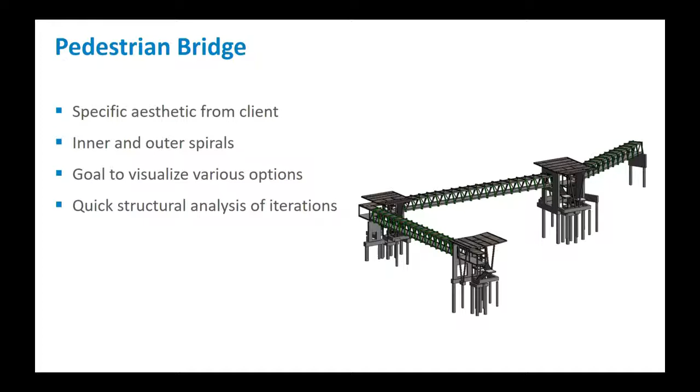So they wanted to be able to sort of stretch and bend and change how this looked to decide what it would be. But that's kind of a complicated piece of structure to stretch, flex, and bend and be able to do a quick feasibility study saying, hey, yeah, that's going to work. Because the structure of the bridge is entirely aesthetic, there's no hidden structural members. We just used what they wanted with the helix, is what we came to call it. So we wanted a flexible model, they wanted to be able to flex absolutely everything. So we had several iterations of this guy.

Then the roof was a little bit more simple in the scheme of things. What we got from the client was a CAD file that he had blocked out sort of the shape that he wanted in a look. And he goes, well, I started doing this and realized I don't even know if this is buildable. So I want to send it to you guys, and can you do a quick study on this for me? Just for a show of hands, how many structural engineers actually get input from their architect that early on? Sorry, I thought it was pretty.

So then we took it one step further. We're like, he wants to take this into conceptual iterations. So we said, how about if we just give you back a tool you can flex and play with, and when you've come to all the iterations you want us to check, send it back. Since we built it, we have ways to get our structural information out of that. So that's what we did. We're going to start with the bridge, and it'll probably be fast. I hope we'll get through all of it, but please feel free to interrupt and ask questions. We tend to talk quickly, so this should work out fine.

All right, so starting out. The general approach of the bridge was it screams repeater, right? It repeats through this inner and outer helix. But it also needed to be adaptive because it needed to stretch and bend, and those angles potentially needed to shift. So we started with a 2-point adaptive component that we brought into a host family and repeated it, and it iterated from there.

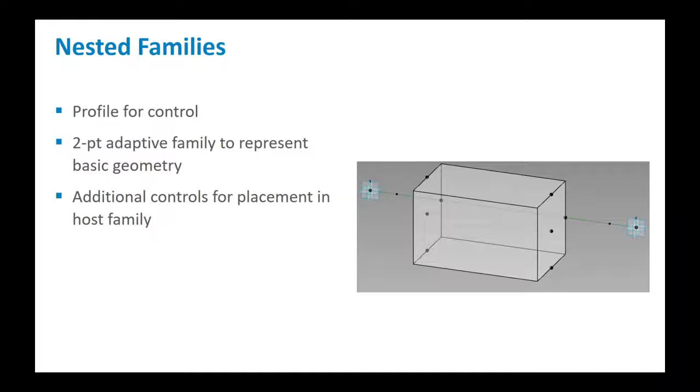Think about insertion points when you're thinking about structural framing. You have the top, bottom, left, and right. It became evident real quick that we needed that sort of functionality. So we essentially made a structural beam out of this 2-point component. And then you want to switch?

Sure. So, of course, Desi just said she needed a rectangle family. I don't play that game when it comes to adaptive components. So for me, I'm going to cover a little bit of what it was. I've been dealing with adaptive components since they came out, I've taught a few sessions on it. And anybody here besides myself find adaptive components extremely quirky? Right? So some of the tools I use eliminate that.

So what originally started with this family I had is I just have this rectangular profile. I don't know if I was deprived as a child from playing connect the dots, but when I'm doing adaptive components, I like to host points on points on points on points and connect those points with lines. It's the most stable way I've found for dealing with adaptive components. In this particular example, I have my 2 host adaptive points, and then these points are hosted to that, set up with an offset. So I just have an inside here, you'll see that in the offset parameter, right here, I just have a parameter for half width, etc. So I like to host points on points to get things to accomplish.

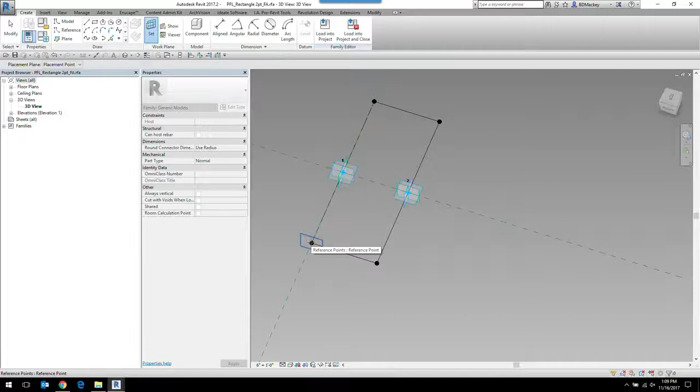When you say you host on points, do you mean you're hosting on a plane? One of those planes? So when you're hosting a point on a point, you can always come up here and hit the set button, and then using the tab key, you can get to any one of the 3 work planes that a point has. I am also slightly a type A personality - she might say more than slightly - but usually what I will also do is name every single one of my points, because then it'll tell me what the host point is.

So as I start going through, who here names their reference planes? Y'all should, because in 2018 you can actually see the name of the reference plane in the project environment. I blogged about this last week, so that's a huge tip for me.

But I do the same thing with adaptive component families. Normally, if I'm going to host a point off of another point, they will all be labeled. So I'll say like point 1 left, point 1 right, etc. So when I'm looking at an additional point, that will come through.

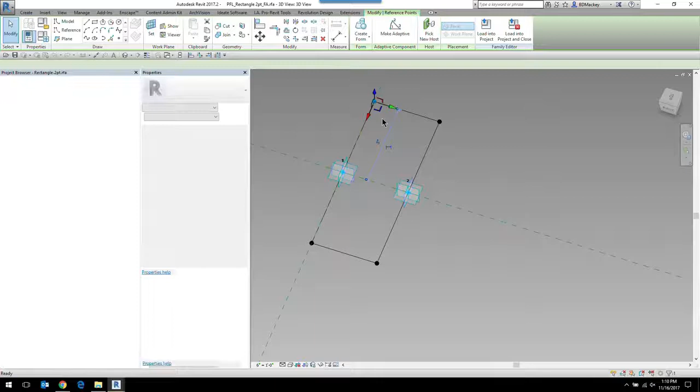So what I ended up doing is I take that rectangular family and I host it into another adaptive component family. And what I have found with adaptive component families that's very buggy is if you host an adaptive component into an adaptive point that's nested, more than likely it will screw up. Anybody put a rectangle family in and it starts rotating and twisting and you're like, what? Well, that's the reason for that.

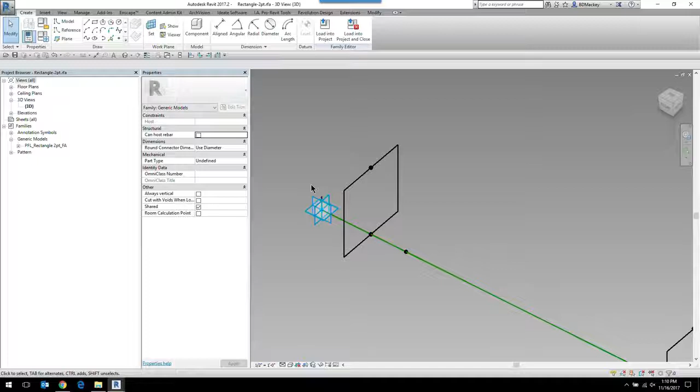I cleaned that up, we're being recorded. I usually say something much harsher than that.

So what I have found is between my 2 adaptive points, I will draw a reference line. And then I will host a point onto that reference line - again, my connect the dot deprivability from my parents. And when I do that, that eliminates the twist factor happening in your adaptive component family. So yeah, sure, it would have made much more sense to take this rectangle and just host it into the middle of the adaptive point family, but more than likely that will blow up.

So I take a point and I literally host a point on this reference line. And what's great about a point hosted on a reference line is it also allows you to then move that point from either the beginning or the end of that reference line to deal with it.

So since I usually want that point to be where the adaptive point is, I always just parameterize this to allow me to move that point in and out. And I just call it control point. So I can just go ahead and move that point in and out relative to the length of the line. I don't really care where it is, just for the ease of editing this object.

So I don't want it on the end because then I've got a point on top of a point when I'm creating and editing the family. So that's the only reason why I have that.

And I did have to make a tweak to this family because originally when we put this into the bridge, we got to the corners and we had the big void in the corners, and graphically we just wanted to overlap them for very quick ease.

So I did redo this, and basically this point then has this point here nested onto it, so I could do a positive or a negative offset to get those to move in or out.

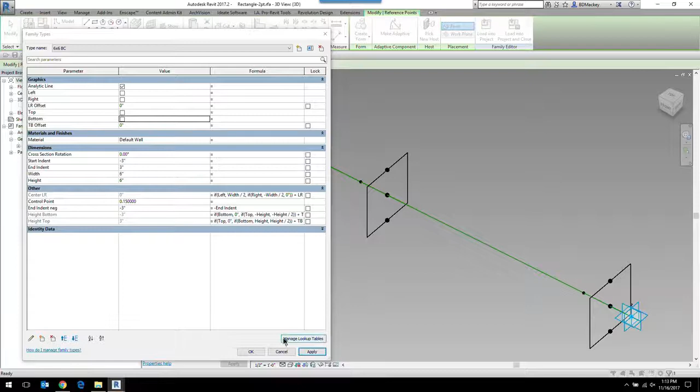This just really comes into play - it was really beneficial in this project here, but also just with adaptive component families where it becomes a pain. Has anybody ever put one in, and on this adaptive point it hosts this direction, on the next one it hosts that direction, and you're like, ah! So rather than loading 3 different families, I can just simply change the insertion point by checking that box.

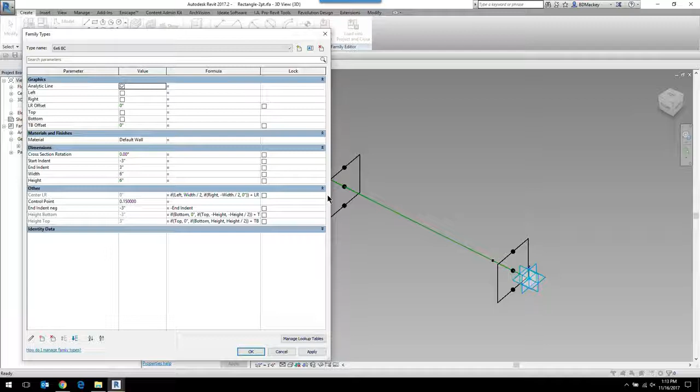And it's just basically a simple conditional statement saying, hey, if that's checked, be half of the width or depth or height, whatever it's going to be. So it's not that confusing.

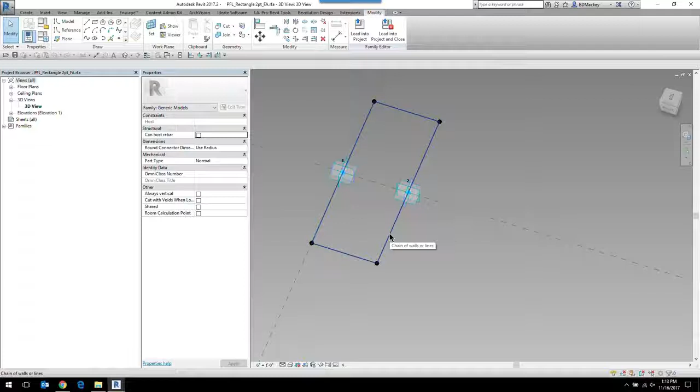Since I nested that adaptive component family, I've got the two here. Going back a step, in that rectangle family these are model lines, so they can't be reference lines, they are model lines. Since you can't use a profile in an adaptive component family, you have to use an adaptive component family with model lines in it.

What's great about it is once I got the rig all set up, I can just select those two nested families, say create form, and I got my rectangle. It's kind of a roundabout way to get into this, but that's really what this family allows us to do.

Once we had that done, we built this. This is the host family. It ended up with eight or nine reference lines that are divided, and this adaptive component is hosted on it and repeated. We parameterized absolutely everything about this, the number of divisions and the length of it, so we could have three different segment lengths.

The architect wanted to know, which you'll see when Brian opens up the family, what the angle of all of the members was, how it was going to look. It was very much about how this is going to look from the ground, as you're driving under it and as you're walking through it.

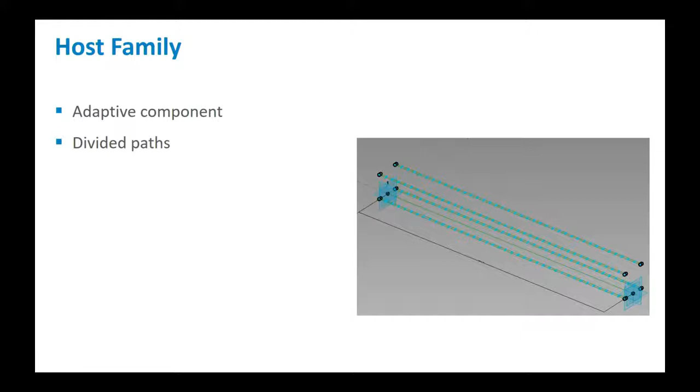So we have a lot of, everything is flexible. It made for kind of a complicated family. And then, so what we did, and what I did so many times, there were so many iterations of this.

This bottom member, they wanted several different iterations, one where it slants and one where it's horizontal, perpendicular to the bridge, giving a spiral look. But the architect found that if you continue the spiral so each element has an angle from the ground, it doesn't quite look like that. It wasn't the aesthetic they wanted, so they wanted several different ones.

This one, I think, is the final one with the bottom that's perpendicular, so that's the outer helix. Then there are these inner pieces that run the length of the beam, or the bridge. So here's the family.

Using adaptive component families, I went along the same approach as with that two-point repeater. In this case, they're not adaptive - we ended up at the very end just adding a length parameter between one and two. Or no, they still might be adaptive, I don't remember, we went through so many iterations of this.

I think this is an earlier iteration. Towards the end, it got really complicated for the architect, or even the project team. I was rebuilding this and placing it for them by the end because so many things were parameterized that it was hard to flex, hard to understand - which I kept saying from the beginning, but they wanted it that way.

Once we had the length locked down, I started pulling that functionality out of it. At the end, this adaptive component was one point, with a set length. So here they are, both adaptive components - adaptive points, excuse me.

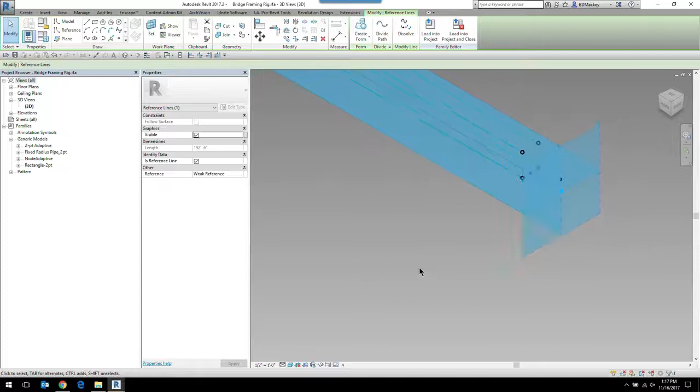We didn't do it with this control point, but you can come up here and say, I want to divide the path. I don't remember when we did this, maybe in Revit 16 or older versions - if you had two lines joined together and divided the path, it would divide them independently. But that's been fixed in the last few releases, so now if you have lines joined together and divide the path, it ignores the fact that there's a join. Really nice feature when they added that in. It's kind of like the old AutoCAD divide command.

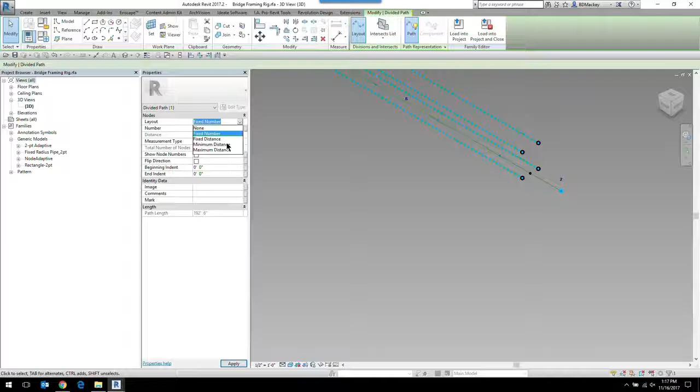So I can come in here and say, okay, I'm going to divide this path, and then you can also parameterize it - do you want a fixed number or a maximum spacing? We went back and forth on that: are we going to go with a fixed number parameter, or a quantity parameter? We ended up going with just fixed number.

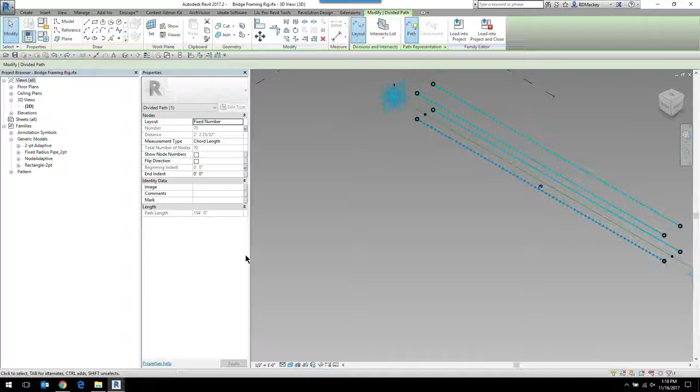That was actually kind of difficult because the client wanted the panel points of the bridge - one revolution of this helix - to be the same in each of the 3 segments, which were all different lengths. So there was a lot of coordination and a lot of formulas, which made me happy, figuring out how many divisions and what the length was. It was actually a little complicated.

It also got more confusing because they wanted 6 divisions, but technically, because of the angle, we were skipping like 4 bays to get it to happen. So like, oh, they need 6, but we have to skip 4. So if they want 6, we have to type in 40 or something weird. It was a little confusing.

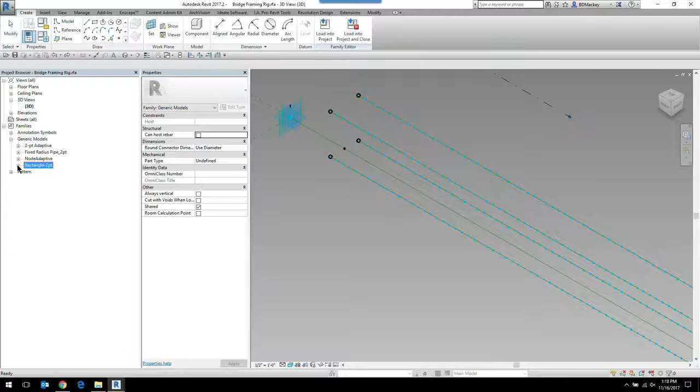Once that was done, I just took that rectangular 2-point family and placed it on here. For those who haven't played with repeaters or divisions, if you just do 1 and say repeat, it repeats along every single one. But like I said, we had to skip a few.

Yeah, it's 4, I don't know, it's 4 with the flat bottom. I'm going to pull Emeril out of the oven in a minute and go bam! We're right near one of his restaurants, I figure that's appropriate.

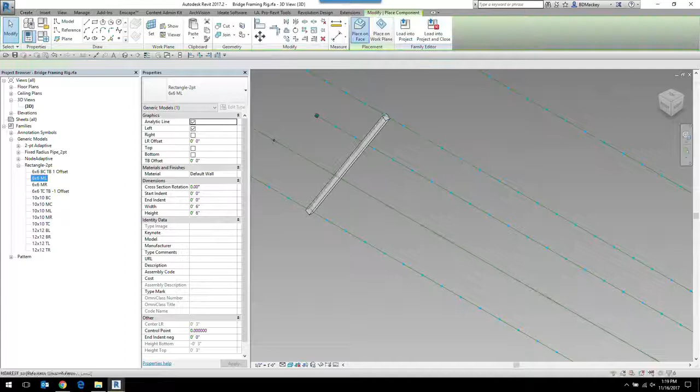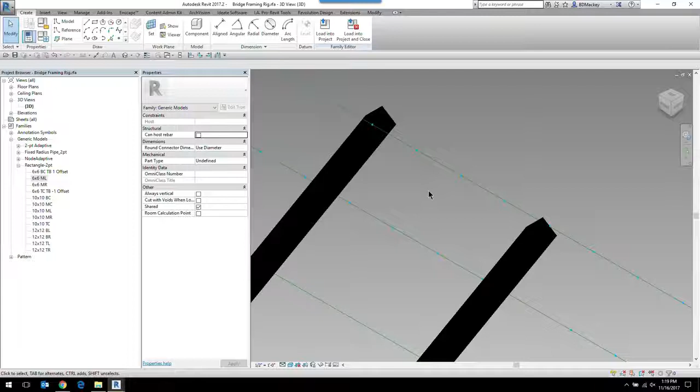But the other thing you'll start to find, and I actually want to do this one slightly different, is when you have that on there, it also matters the way you pick when you're working with adaptive component families. This one, it didn't really matter, but you can kind of start seeing - I went one to the middle right, but if I take both of these, with the family that allows me to change it, if I go from the middle right to the bottom corner - because this one I went up and this one I went down - you can see they're on opposite sides of that line. So with adaptive component families, directionality, the way you draw things, becomes very critical.

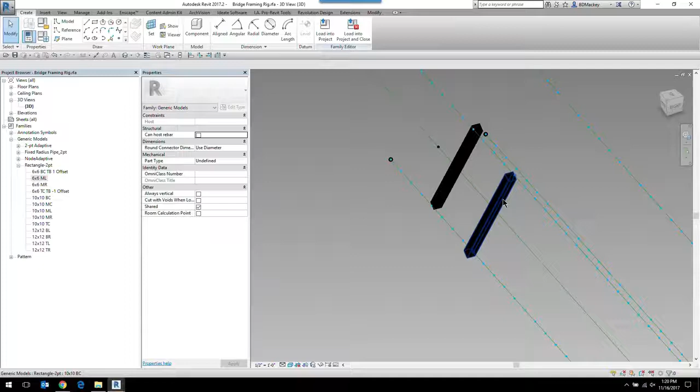When you have to delete things and redo it in like 3 weeks, you're like, crap, did I draw them this way or that way? Inevitably you'll get it wrong. It sort of puts in your face what we all preach to people we work with: always model in the same direction, do it consistently. But when it comes up to you like here - I'll model this 2 different ways, so it's going to behave in opposite directions - you suddenly have to really adhere to those rules and immediately see why. That was challenging with this, especially once you got all the members in there and had to figure out which point I'm grabbing - it became complicated.

So with that, what we started doing is we selected this, and then you can go up and use the repeat command or the array-looking icon, and since we had 3 spaces between it, it will continue that going across. We had to do this going up this side, across the top, down the other side, across the bottom, kind of making that spiral effect going around.

And that was what we did just to start, just to get the concept to show them, hey, here's what the spiral pattern will start to look like. So, do you want to pull it out of the oven?

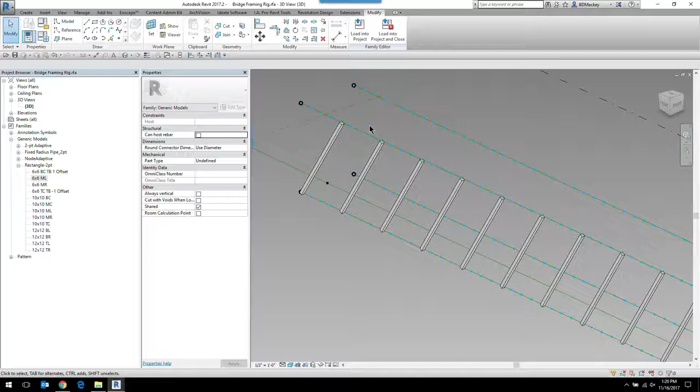So what was kind of interesting with this is that we built up all of these angles, those are just reporting parameters so they could understand what the angles were. She's talking about these dimensions here.

So then the client said, well, we have a logo that has a whole bunch of angles. What angle are you? So we can compare that to the logo. Yeah, we're not joking.

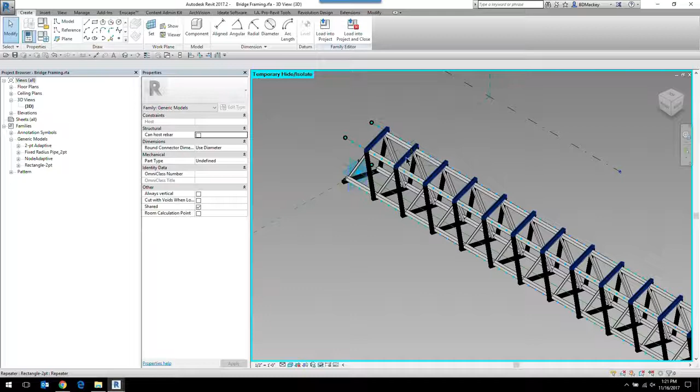That was real. In fact, if you orient it just right, you might be able to guess who the client is, which I think I've removed from everything. So if you accidentally see it, pretend you don't know it. And if you guys from that client are listening to this recording in a year, we had your permission to show this. I did ask for permission.

So what was interesting about this, we built in all that parametric behavior so we could go from, we ended up calling it bays, 13, 16, 17, 18, 19 bays for the different lengths of the bridge. But we found out, and it's a really strange behavior, and I started asking other people that have done a lot of repeaters if they've noticed this behavior.

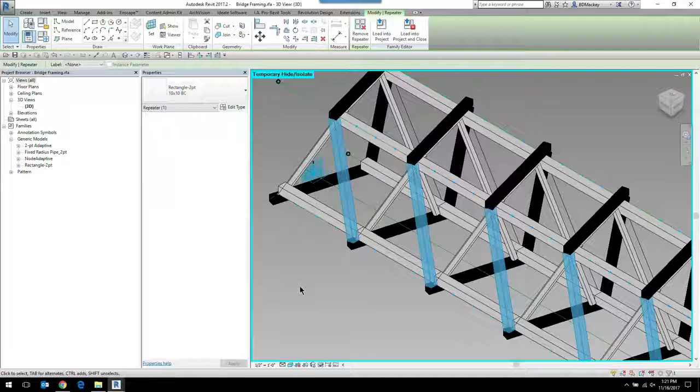We don't know if it's something that's repeatable, but it was for us: if you change the number of divisions, say go from 13 to 16 bays, the division is centered along the repeater path. So I want to add one complete revolution to the end. Instead, if I added one complete revolution, it was adding a half to the beginning and a half to the end, which was annoying.

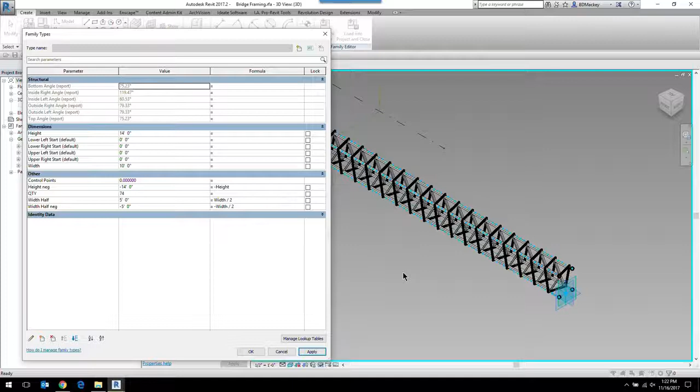So this ended up being 3 separate families that, of course, they couldn't decide between. So I think I have 10 — I have like everything from 13 to 20. So there's several. That was kind of complicated.

So this is the final family here. No, this isn't the final. No, it's not? So the other thing about this that I ended up actually changing and building into these families.

Back to the family, I'm going to go to it. When we put it in there, we realized, oh, we've got to do the inner spiral and the outer spiral. When I had this set up, they also were then going to start having some additional offsets. So that's not the button I wanted.

So back in the original family, I went and tweaked it even more, because on that rectangular 2-point family, I showed you guys how I have basically the left, right, center checkboxes, but we had to go in there and also start adding in an offset, because in some of those cases we wanted to — I'll make it bigger than that. So now it looks exactly like structural framing on a family, right?

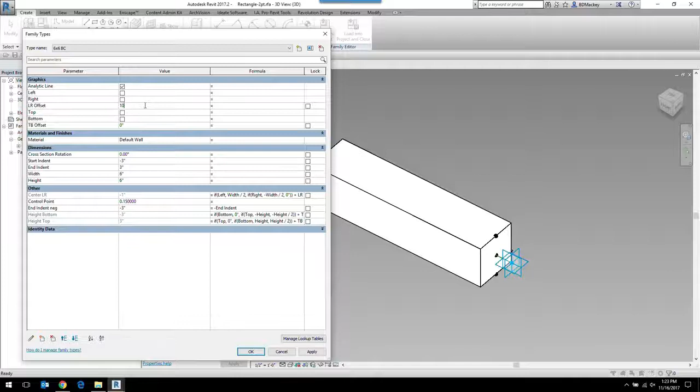You have the Z offset. Yeah, and the Y offset, Z offset. So I also started assisting in that as well.

So when I told you guys I had this point and then I hosted this point onto it, I then had to redo it all, rehost another point so it would get shifted off to the side. So I could shift that with a positive or negative number, because we really needed to come in there and start playing with the original family that we had.

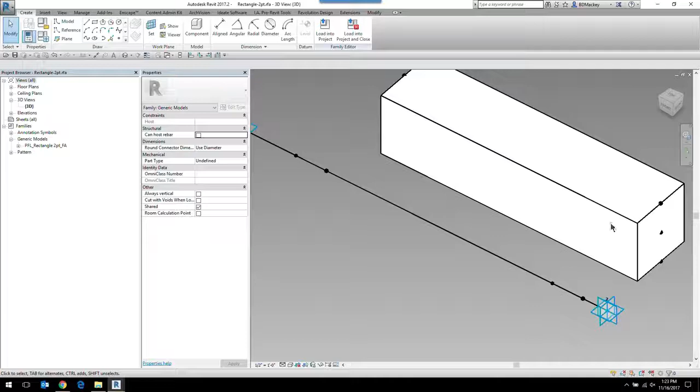We were sitting there thinking that, oh, okay, so we'll just have this one set of repeaters and everything will be on it. The final family, we ended up having additional lines to host the inside members to, the outside members to, the floor members to, the roof members to, etc. So it wasn't so simple, but we had this set up to be able to come through.

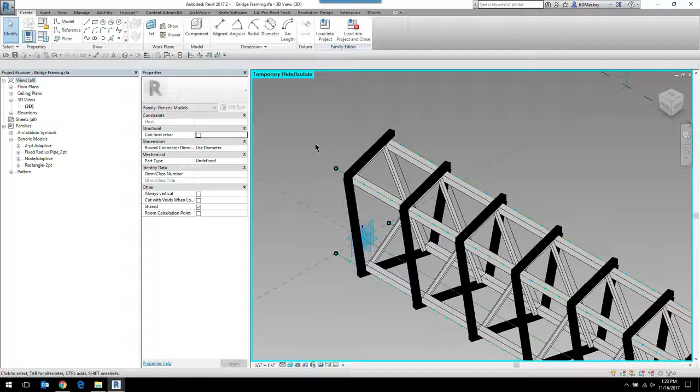So in the bookkeeping part of it, that was difficult — you'll see they have the exact same number of divisions along each of the paths, because they had to line up. And that's what became like a bookkeeping nightmare: this first member went from point 1 to point 2, and then this one is like 0.5 to 0.6 or whatever it is.

So I'm going to switch back and show the profile. This is the finished section of the bridge. You can kind of see the gaps in here, and this is what eventually caused us to have 8 divided paths instead of 4.

And then those offsets, all of these members are hosted off that inside point, the insertion points. This point we have for the inner helix, you could call it. Then there's floors and the metal deck and such, so now it looks like a structural element. It wasn't green, it's just so you can see the outside and the inside.

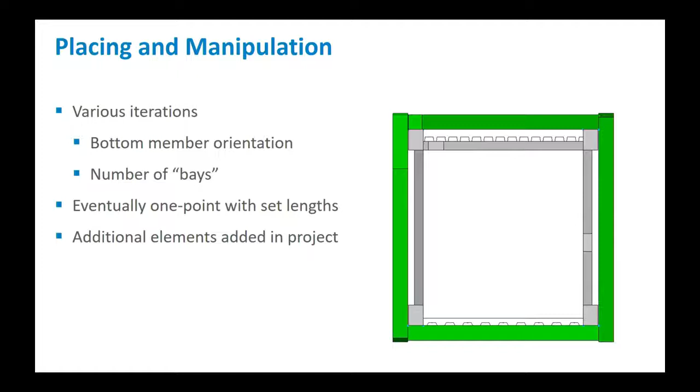Okay, now the castings. One of the ways they wanted to fabricate this was to have each of those corners—I'm going back here—as it comes around this corner, think about the way that looks with the bridge. The corner comes across at an angle at the top, and then the side is at an angle there too, so you have like a compound angle.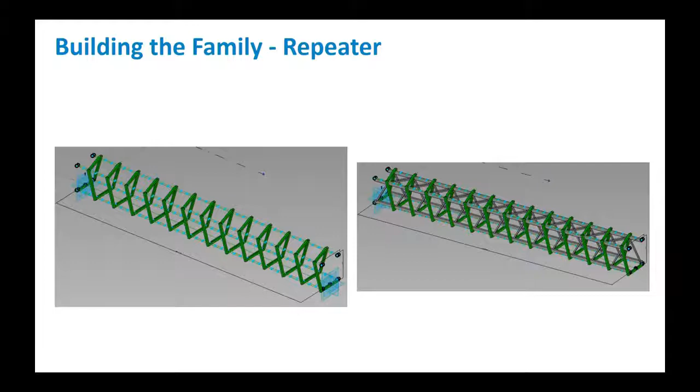Is that the word I'm looking for? It's angled in more than one direction. So this is actually quite a complicated geometry, and they were going to make this out of castings, so symmetry was an important thing.

We wanted to have as few templates as possible. So we spent a lot of time—an amazing amount of engineers standing at a table trying to visualize exactly what this was going to look like and how many unique cases we had. And we got it down to 2.

With the bottom, the bottom angled element was perpendicular, and then the top was angled. Because if you rotate it around—like kids' toys with spatial awareness—if you rotate it around, the angles end up being symmetric. So then we thought we would model these so we could see it in the project itself.

But then we got a little bit—I've used the geeky term again—and we thought we could 3D print this. So we went above and beyond to create this, and part of the impetus was that we were having a really hard time communicating how difficult this geometry was to our client.

They didn't quite understand that as you come from an angle to an angle with 2 elements that are exactly the same size, this little part here is going to get bigger. You can't just turn that corner and keep the same size and everything. It's not a tube that you just sort of bend.

So you have these sort of tapered, bigger edges, and they had all these requirements—if you're looking at it, they didn't want to see the element get fatter. So it was difficult.

So I spent all weekend, one weekend, and it was pretty much brute force—just massing these things out and getting the angles, and going back, thinking okay, this is what they're going to want. This wasn't clean, it wasn't what they wanted.

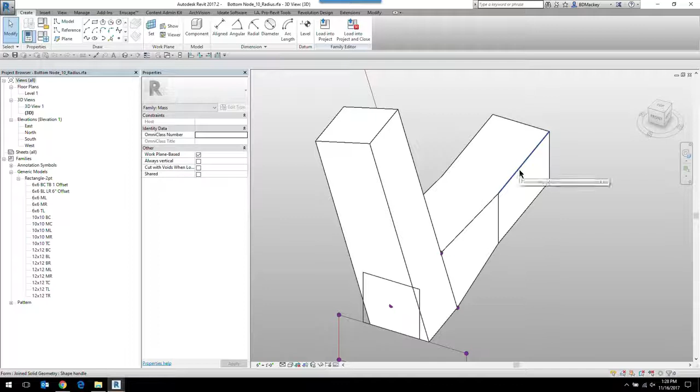But this one really isn't intelligent - there's not any parameters to this. What really was difficult was trying to get everybody to understand this. So we just ended up basically coming in here with a whole bunch of rectangles and saying create forms, and this rectangle, create form, etc.

To get this, we really, really, really did try to fillet these corners. Revit would not do it. We couldn't do it with voids. We couldn't build it into the curves. Revit just simply would not do this. Trust me, I spent way too much free time trying to get this to happen.

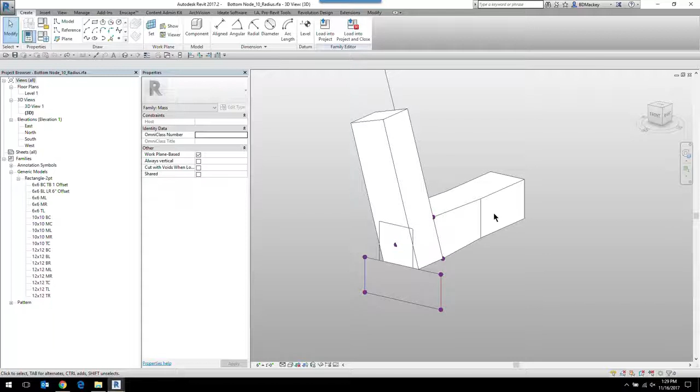We could do it pretty easily at these places, right, where the profile is constant, and back here. But in this sort of tapered section, which caused huge amounts of conversation - how far should it taper from this kind of thick, knuckly looking thing to back here? We had a really hard time here, and then don't even talk about that corner. Like, how do you - I don't even know.

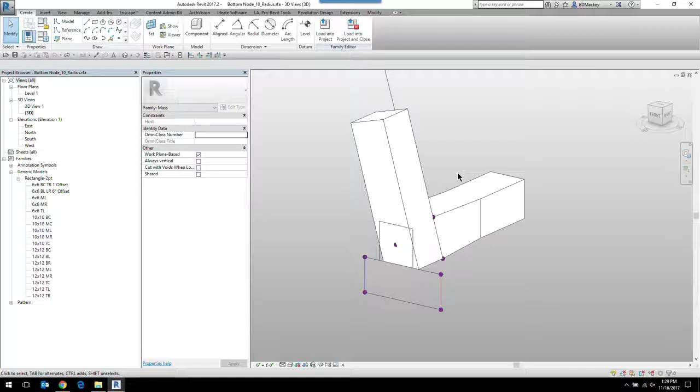So we actually took this and exported it out to DWG. If anybody's never actually been in AutoCAD, there's great 3D modeling tools that they stole from Inventor. When I was back in AutoCAD, I didn't open that because it was pretty brute force and I don't remember AutoCAD well. But when we did do that, we went through and basically hit the fillet command in AutoCAD. It did it seamlessly - it did it really well. And AutoCAD also has a hollow command, which this one is not hollowed.

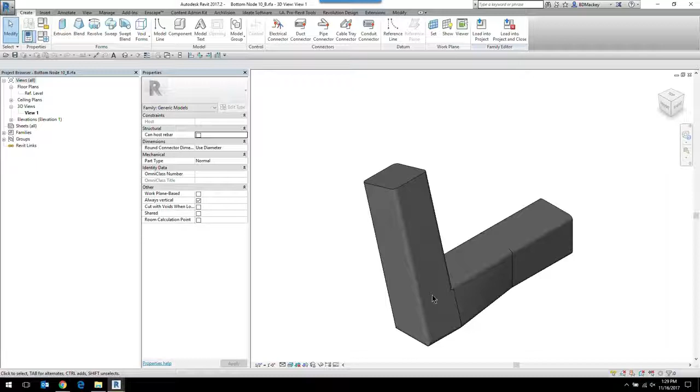I didn't need it in Revit, but we did that for the 3D printer. So in AutoCAD, we used the Inventor fillet tools, we used the Inventor hollow-out tool so the whole thing was hollow, and we sent that to the fabricator for them to look at for 3D printing.

But I did import the DWG back in and explode it - yes, I exploded it - and I ended up with basically just this direct shape type object in there. And again, this was more just to put into Revit to give them the graphics of what you are going to need, because these square, uncompound, uncut things was freaking everybody out. Yeah, so they weren't getting those nice smooth corners.

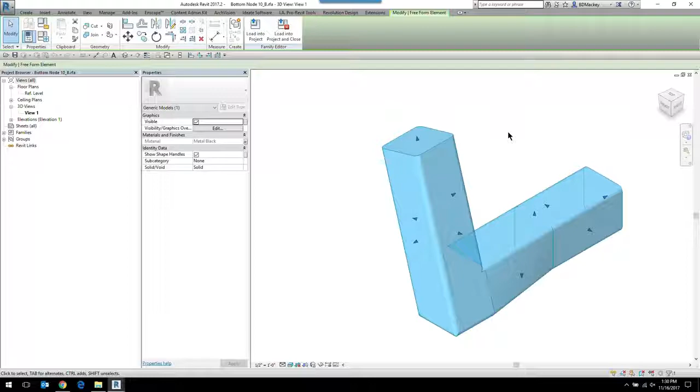So we actually put these pieces inside the project, and we just plopped them right on top of the bridge, in no fancy way. Plop, align, align, align, align. They weren't adaptive - they were just, hey, they came from AutoCAD.

There you go. Okay, so then now we have our pieces, and then came the structural part. So I was thinking that all we really needed was coordinates, because we can set up the analytical model to know which members go from which nodes to which nodes. So I just needed the coordinates. I thought, well, I'll just grab all the generic modeled elements and get their endpoints, because I'm thinking it's a structural framing element, right?

So what I found out very quickly is that in Dynamo - now I don't pretend to be a Dynamo expert, I know just enough to do a few things like this, so I'm sure you could learn a lot more from Carl.

But what I found is I was having a really hard time dissolving that generic model, which had all these profiles - especially the bells and whistles we had built into our profiles - into one simple curve with endpoints. I was getting multiple curves. Think about every edge on that, all the way around the profile on both sides and all the way along the center line. So it was not working for me.

So what I ended up doing is I made a little tiny element - I called it a node - and I put it on the repeater at each node. Then I was in control over which coordinates I actually cared about, and I didn't have any duplicates.

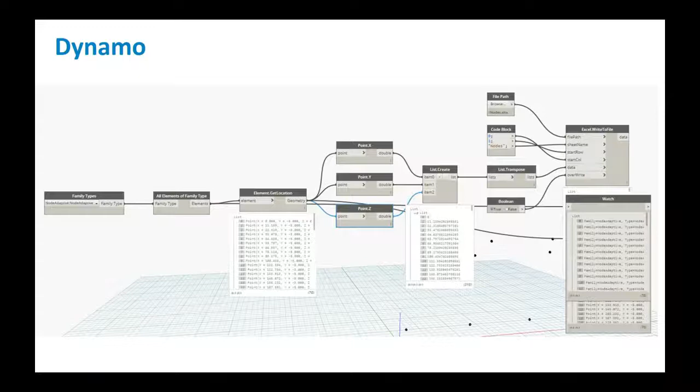So that's what I ended up doing, I created this little ball shape, put it in the family, and I was done with it. Then I had a relatively simple Dynamo script, this is the entire thing, to pull out the coordinates of those nodes.

While he's running this, get your QR scanners ready. But we found out today, literally at lunch, if you have an iPhone, your camera is a QR scanner. We didn't know that, did you guys know that? New iOS, your camera is now a QR code reader. I did not know that. That was a new feature of the iOS. I learned with the new iOS, so yeah.

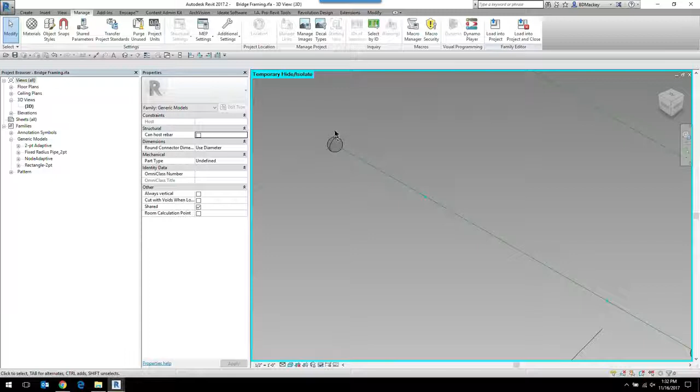So this is Desi's highly sophisticated adaptive component family. It's a circle, just not a square, throw out. It is adaptive, so if I go into X-ray, you can see inside of here there is an adaptive point in there. She then drew a line and said, hey, create a solid. So a very highly complicated thing. But no judgment, though. I don't even think you parameterize it. It's just a circle. No, see, I couldn't not parameterize that.

So then she just put it in there and used the repeater command just like normal and basically repeated it where she needed to. But again, it was the same scenario, put it where they're intersecting. So one of those little bit of a pain, put it in, make sure you're on the right one, and set that up.

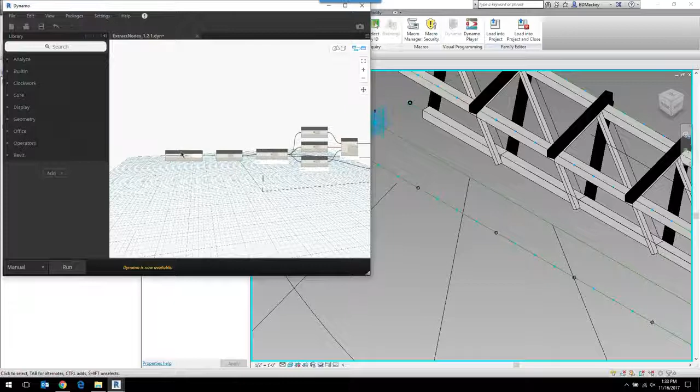Once she had those inside of there, there was a Dynamo script that was written that says, hey, you're looking for that family, and we're just going to go ahead and run this and export this out to Excel. Super simple. So then she got an X, Y, Z coordinate of every single one of those nodes. It's not as sexy of a spreadsheet as the other one we'll see later, because this is all the analytical software wanted.

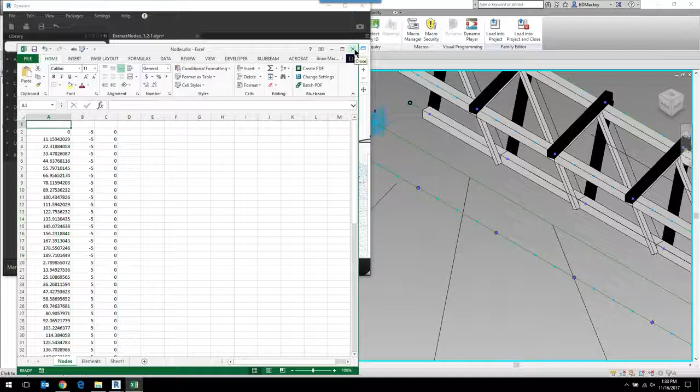We just wanted something we can copy and paste, and it doesn't need to be pretty. So that's how we did it. I've now done this, we created this kind of workflow to get these simple points out, and I've now done this on a lot of projects. I'll show you a picture of another one at the end, and a lot of different iterations of it, with points or endpoints or columns or whatever. It's turning out to be pretty handy, so take the time to make a little Dynamo script to pull some coordinates out.

Well, I just thought it was going to be cool. Like, I'm a structural engineer sending them Enscape stuff, like, they're going to think this is so awesome, they're going to love us. They were not impressed. I was like, I emailed you a QR code and you could see the bridge, isn't that awesome? And they were like, yeah, we didn't really look at it.

Well, and that's what was really helpful with this. I don't do a ton of this structurally because it's not generally something that's super helpful, but this was because they were really concerned about how the structure looked from specific viewpoints, so underneath being one. Well, wait till I just don't see cameras in the air anymore so you guys can scan this and look.

So yeah, this was done using Enscape. I've been preaching Enscape since they were in beta, and I've been using it for a few years now. I like the ease of Enscape. This was shortly after they came out with Save the Panoramas for the family one. So we were walking around it through the file, and then most of the cameras are down now.

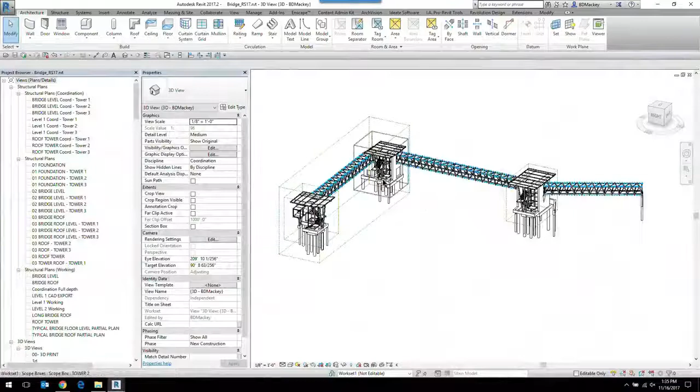So this is what their final bridge project looked like. You can see these are the adaptive component families, which really aren't adaptive anymore—they're basically just, hey, we've got the points stagnant inside of there. Then they used standard Revit structural modeling tools for the stairs, the structural columns, and everything else. But that is the crazy custom bridge the client really wanted to look like.

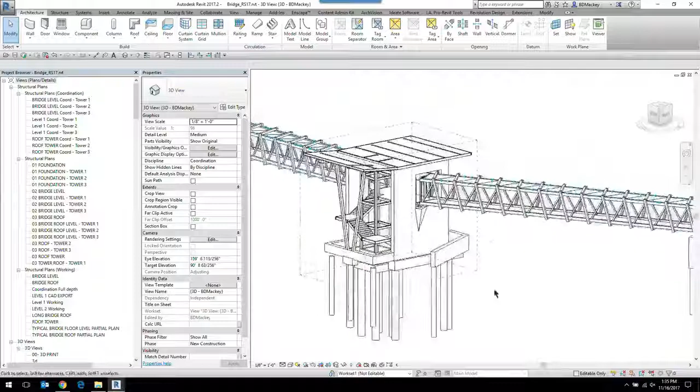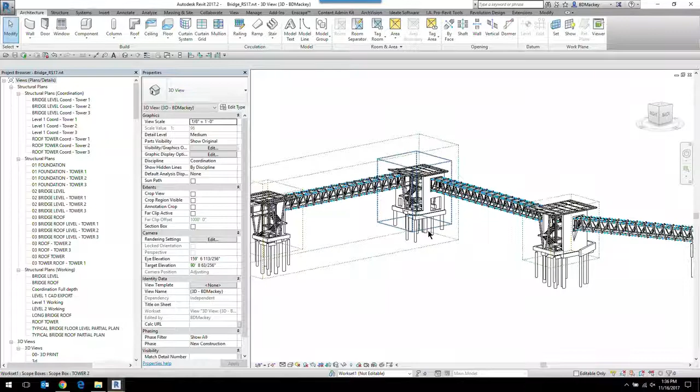That's probably why they weren't impressed. I was like, I don't really care what color the ground is, I'm looking at the structure. There's no trees, there's no people, there's no road.

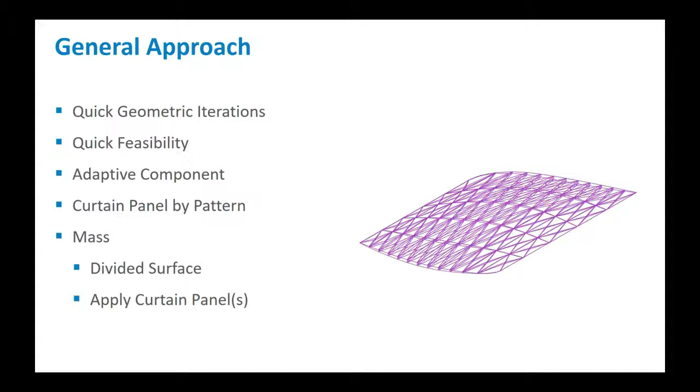So the overall roof is a mass, and then a divided surface instead of a divided path—notice the theme here. And then we hosted that pattern on the divided surface. So here's the pattern. I think this is one of the custom ones we ended up doing to get one of the looks he wanted.

Just a simple triangle. What we did was host that 2-point adaptive component, representing my structural pieces, from here to here. Originally the client wanted different tapered lengths and stuff, but we didn't actually get that far to build that in—though that could have been interesting.

Another thing we realized on this too—we put the 2-point adaptive family on all 3 corners. Since it was going over a warping edge, you get this one square here and this one square here, perpendicular to the face it was hosted to.

So we ended up with all these little V things. Yeah, and that's why eventually we realized we just needed to see if there was structural feasibility to it. So that ended up getting yanked out really quickly.

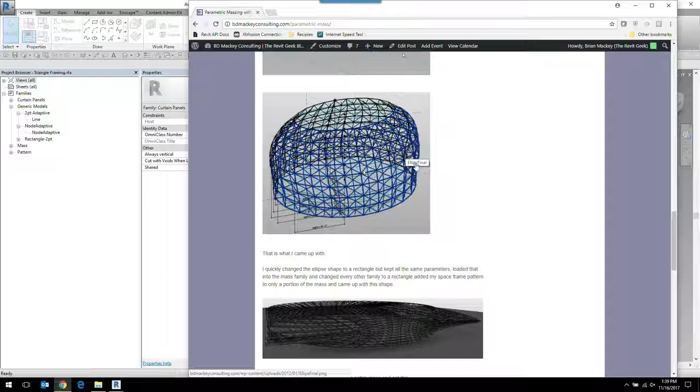Here's that blog post, as you said, back from 2012. But this is something that came back. I think we were still in Vasari back then, but I was doing curtain panels by patterns. That's what it was. This also talked about when Vasari had the sliders, because I was showing people the sliders.

So we had just been playing around with this curtain space frame, because Desi had some other project that needed a space frame truss. So I was, of course, building the table in Grasshopper - it was back in my Grasshopper days. I was geeking out on this, creating this, and then we played with it. So feel free to go check that out.

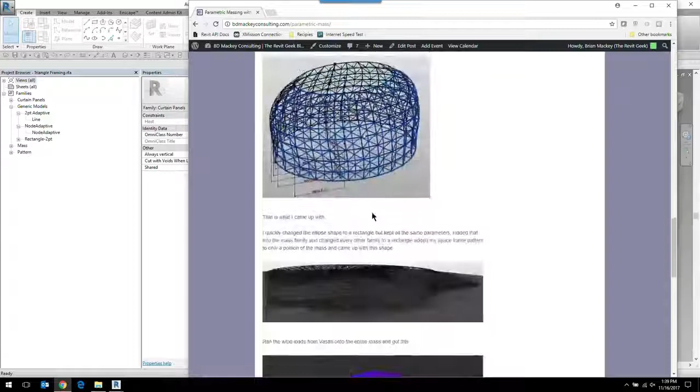And then the Vasari wind analysis - that was a blog post he was talking about.

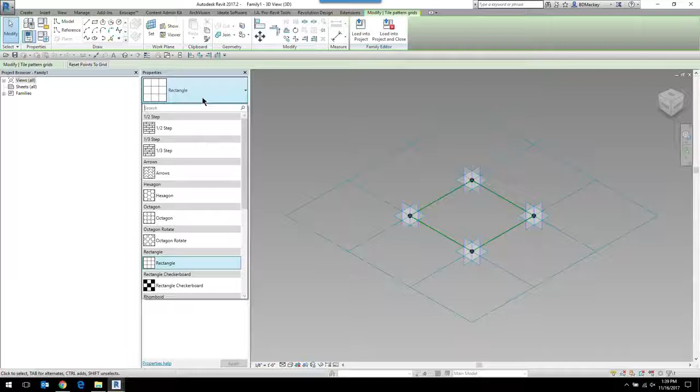But back here, we started off creating this curtain panel by pattern. For those of you who haven't noticed, when you start with a new template for a curtain panel pattern base, if you select the grid, you can then change it to different types of patterns. So it was as simple as trimming this and grabbing one of the triangles - I think it was the triangle flat - and that switched you to having the 3 points. Once you have those 3 points, with that adaptive component rectangular family I had, it's easy to go from point 1 to 3, 3 to 2, 2 to 1, and place that in there. But what we found out really quickly is that double lines were everywhere.

So then I was starting to parameterize - we would do one and not the other, put them on one side and swap the panel. And Desi's like, no, I just need points. Stop geeking out and let me get my work done. Because that was the thing.

So as we applied this to the surface, a triangle on this side could have another triangle right next to it, so this element would be duplicated. But all I was going to do is get the coordinates of the points dumped into a spreadsheet, and then I could cull the duplicates. So I was like, I don't care, let's keep it simple.

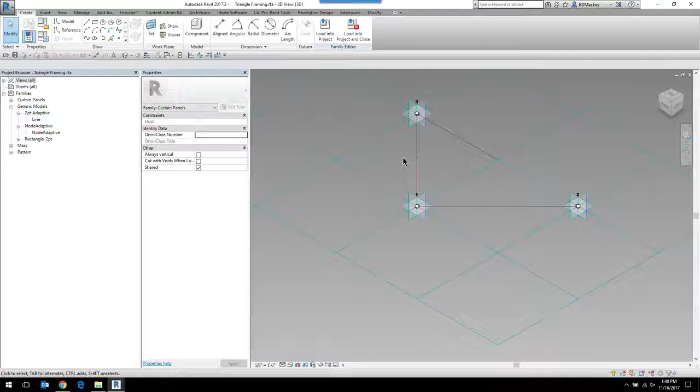So we ended up loading her advanced adaptive component, because we ran into the same problem - we had all these complex curves with that 2-point adaptive. So I put the nodes in there. It's a really simple solution, but heck, it worked, so who cares.

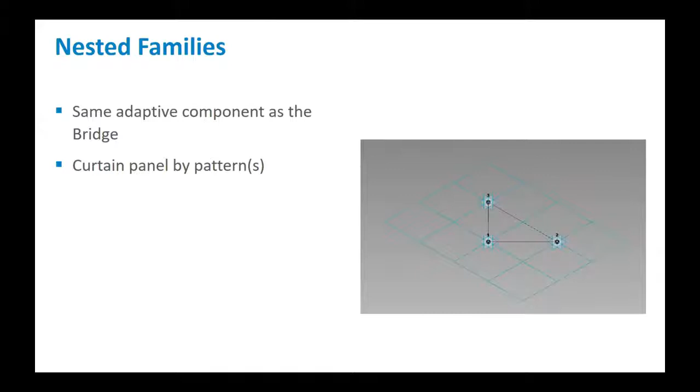All right, so here's the mass - and this was surprising, this took the most time of anything in this project. So what I did is I took their DWG, tossed it into the mass family, and traced, for lack of a better term, 3 curves. I wanted to keep it really simple because the client wanted to be able to adjust this, but he knew he wanted this overall rhombus-looking shape, with 2 corners and then 2 curves.

So these 2 curves on the end - I guess it's easier to see over here, or maybe not - these are flat. This holds the elevation essentially of the edges. And then the center defines the curve, but it's curving like a dome, in all directions. So it was a bit of a mind bender for me to figure out how to define that with as few points and curves as possible and still match his overall shape - 2 flat curves with 4 points each, and 1 center curve with 3 points.

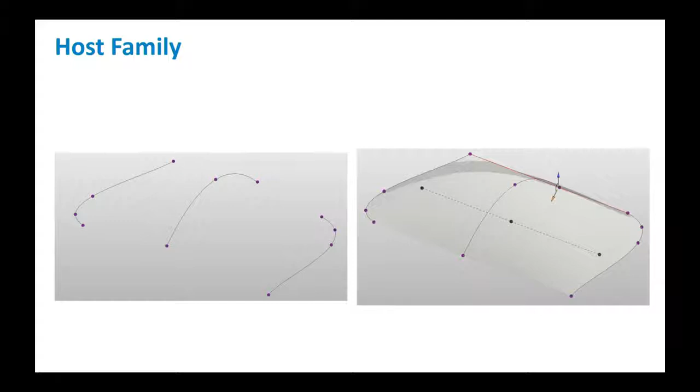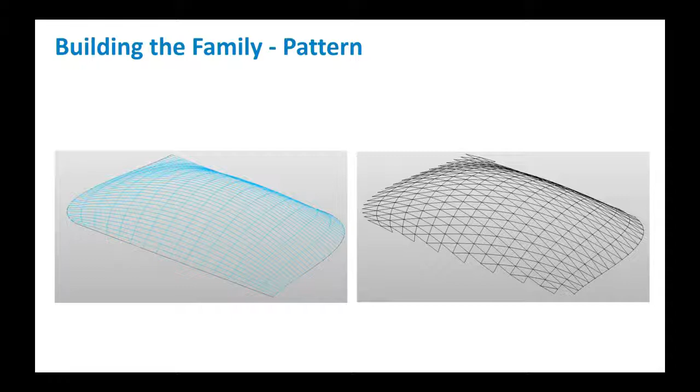And then once that mass was created - so a very simple mass family - I did a divided surface. That's what you're seeing here. And then you can edit those divisions, so the client could edit how many U and V divisions he wants and apply the pattern. I think that's... yeah, you want to show them the mass family?

All right, so inside of this Revit family is the mass. This is the DWG mass that they did get from the architect. I don't remember what software they were using, but they gave us a DWG to do that. So, like Desiree said, we just brought it in, put it up at the top, and then we had to go through and start pointing it.

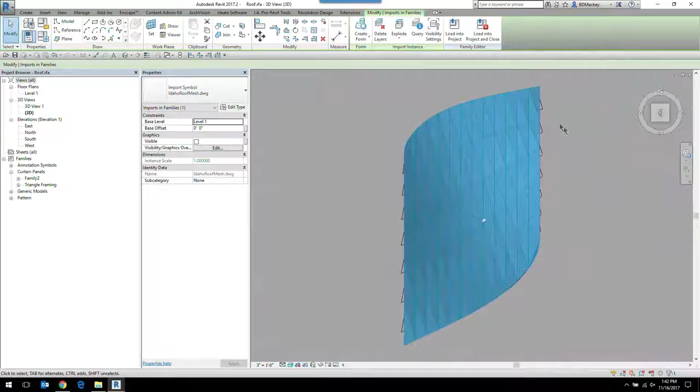So if I grab the surface, the form for the divided, and I go into X-ray mode. So what we ended up doing to start off is exactly like what Desiree said. We kind of put their thing inside of here, and we just put some points down to somewhat represent where they had their AutoCAD file.

And then once those points were placed, we just did a spline through points on those, and I'm going to go hide this AutoCAD file. So once we had those points placed, we just did spline through points on these. Same thing over here, and then same thing up here. And it wasn't really set to where it needed to be.

And then they shipped this off to the architect. So look, here's something you guys can play with. We have this family available to us.

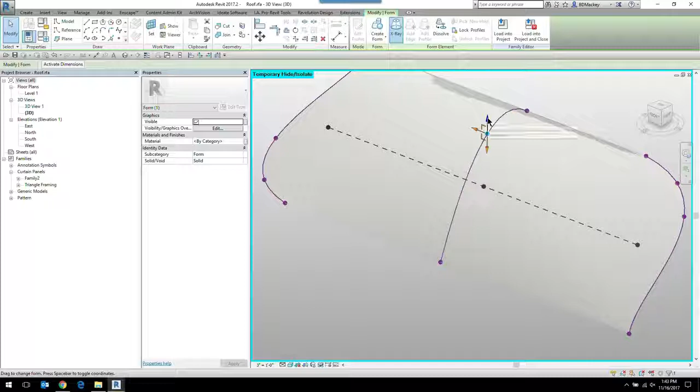So if you go into X-ray mode, grab that point. I'm not going to adjust this because I don't think you guys want to sit here and look for the next 15 minutes at Revit thinking. But take that point, move it up and down. All of that divided surface will start to go through it as well.

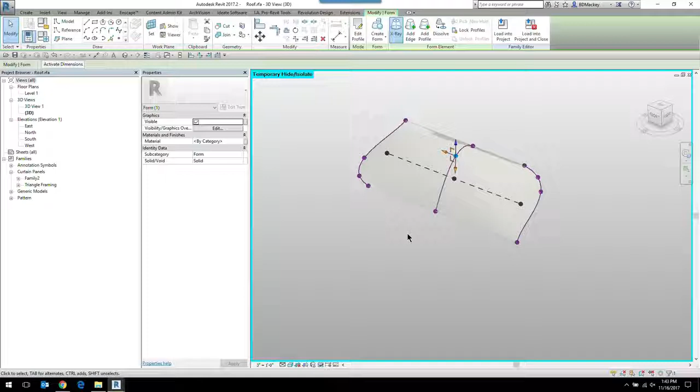So then they could give that back to Desiree, and all they do is run their Dynamo script to get the Excel points. And it was a pretty easy tutorial to give, like press 3 buttons and do it in an email with a few screenshots of how to get to that place and be able to push and pull those points. It seems to be an intuitive approach to it, so that worked pretty well. That was a good communication tool.

So once that was done, it was just a matter of going in, let me get out of X-ray mode here, and just taking that and dividing the surface. Figuring out the quantity of divisions was the other difficult part to get what they wanted.

So once that surface had been divided, you've got your U grids and your V grids, so just playing with those. I don't even think we made that parametric for them. I think it was... No, yeah, we did. I sent them the family. I didn't even put it in a project. I just sent the family and gave them a quick tutorial of how to use it, with a disclaimer that if you jack with it, it's going to take forever to adjust.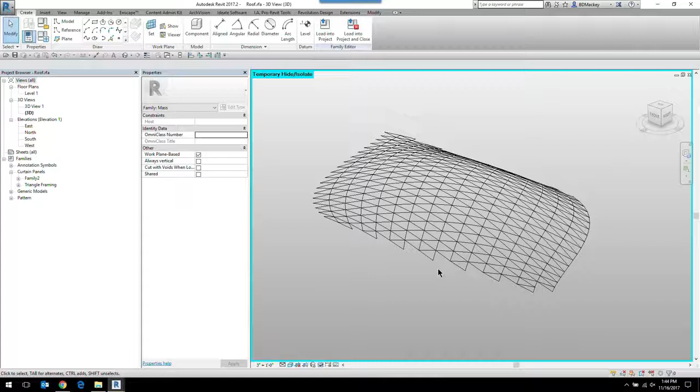I suggested that once they kind of play with it and they like it, do a save as, play with it until they like it, and just send me back 10 files or 15 files, whatever ones you like. We'll do some feasibility studies and decide which one's the optimal solution.

And we noticed there was some odd things. This is divided a lot more than I think what they ended up with, which was far fewer. But there's some kind of funny things along the edges where it couldn't quite resolve that particular pattern. We showed them how to swap out the pattern for different sort of looks.

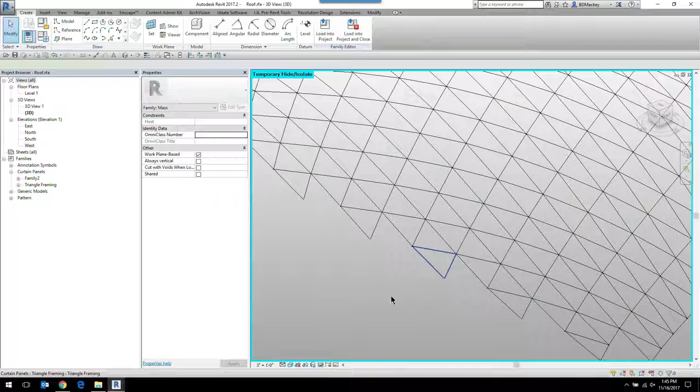But we weren't really concerned, I mean, we're really early on here, right? This is very early in the project, so we weren't real concerned about what that looked like. And besides, I still had this point and that point, right? So in the analytical software, I could just put an element there if I wanted.

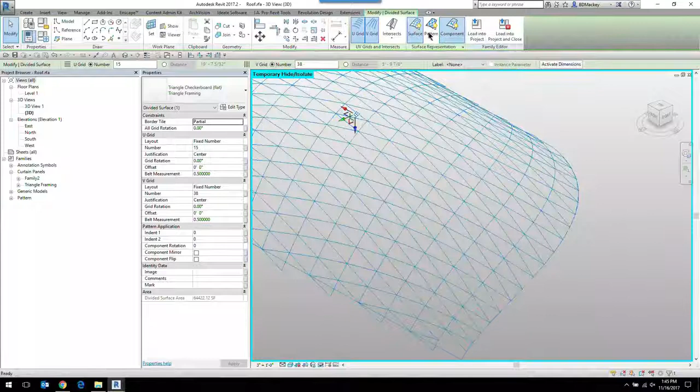So then once that was done, I'll go back, hide the AutoCAD file. Just went through and we had, let me turn the surfaces off. So that was the divided surface, then you just did the division, and this was just the family. I don't think I have the right family with all the little nodes. And then I forgot to open up Dynamo, and then that's okay. So, ran the Dynamo script.

Yeah, so we'll go back to the PowerPoint for the Dynamo thing to show you too, but we quickly found out, and why Brian didn't flex this for you right here, is that those adaptive components inside the curtain panel by... curtain pattern by panel. Yeah, I do numbers, not words.

The combination of those two things, depending on how many times it was divided and how many different iterations, the churning of this was ridiculous—like minutes. I hate when I can think faster than my computer. So we were trying to think about how our client was going to be playing with this. Doing one tweak and sitting for 5 minutes while it thinks is not a good conceptual tool.

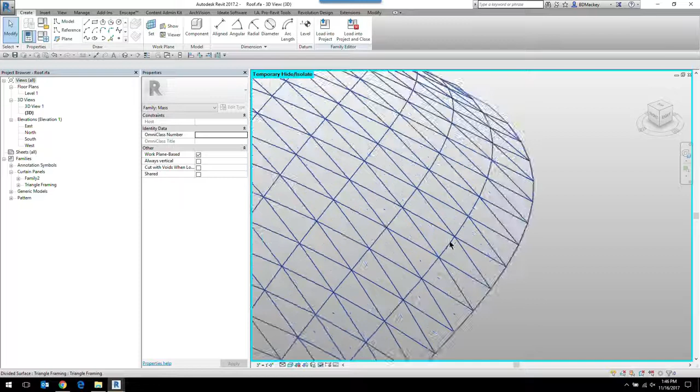So what we decided was that we didn't need each of these members to have a thickness, because I don't know that he cares, nor that we necessarily know what those sizes would be. So we ended up pulling out the mass part of the 2-point component and left just the line. That really simplified the geometry, and then it just ran like gangbusters. My poor little adaptive analytical node was no longer necessary because what I had was a line with endpoints. So we made the model run faster and also benefited the Dynamo.

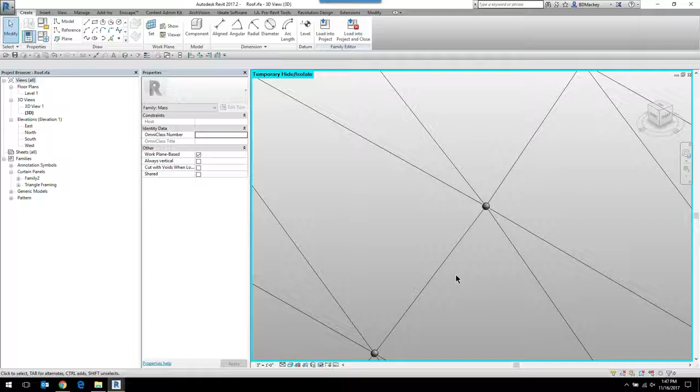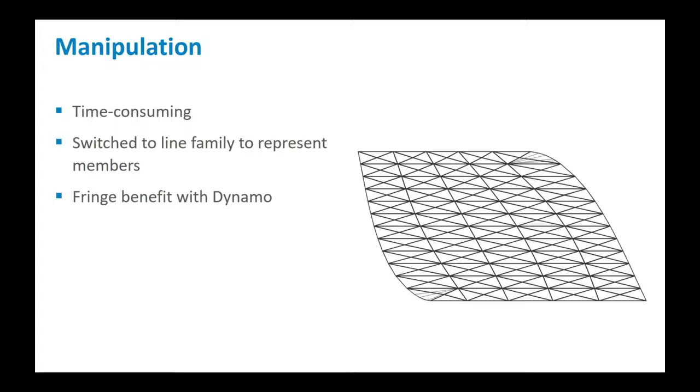So we're going to switch back to the PowerPoint real quick. Made the Dynamo go faster. That's kind of what is here. I think this is one of the final concepts I kind of liked. When we switched it to the line, it went faster. And here's the Dynamo script.

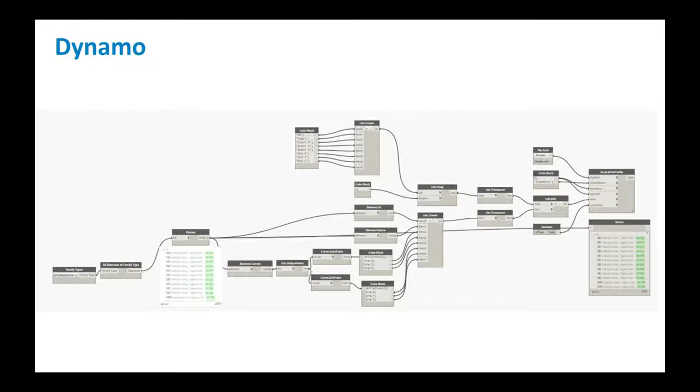Pretty simple. This one is a little bit more fancy because I could. This is just the endpoints of those elements. Hey, we're on time. You want to show the Dynamo? Yep, so then here's that Dynamo script. A little bit messy.

Well, you know me. Did you know you can hit Control L in Dynamo to line up your nodes? You know how he found that out—I got a text in the middle of a workday one time, and he said, 'Do you know that Control L in Dynamo will line up your nodes?' I said, 'No, why would I know that?' It was a long time ago. I asked how he figured that out. He said he was on a really boring call with a client, so he opened up Dynamo and held down Control and pressed every other letter. He thought everybody did that. He also right-clicks on random stuff in Revit just to see what happens.

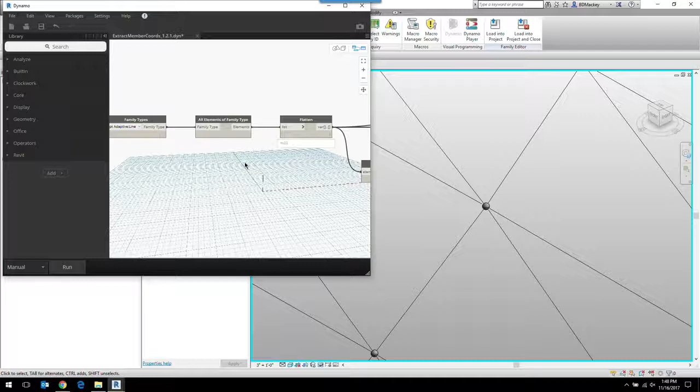Anyway, so that's the Dynamo script. It's very much the same as the other one you saw before, except this one's a little different because you had to get it off of lines, correct? Yeah, so I used the lines and then got the endpoints, which is where I was going originally with that bridge, but I was getting too many lines. Although it did seem regular—give me this profile and the center line—that was just way too much list management for my taste to get every fourth item or something. So the node was a far faster solution. But this one, I just had lines and endpoints.

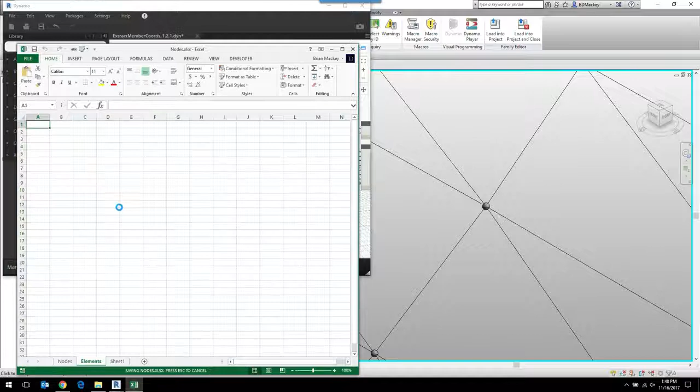This one's a little bit sexier. You know what you need to keep in mind—sometimes more data just equals sexy. I'm just saying.

Yeah, so here's all of it, and this was different analytical software between the two projects. We copied and pasted into a second spreadsheet for this to do some churning of the data, making sure we didn't have duplicates and things like that. But mostly it was really easy to get into the analytical software. That was one of the problems in the bridge too—when we were trying to use just the adaptive component families, we got duplicate points because you had a line running across here and another line coming up to that same point. Originally when that had the inside structure, since we were offsetting the members graphically, we then had like 4 points there. Which is why the node was such a good idea.

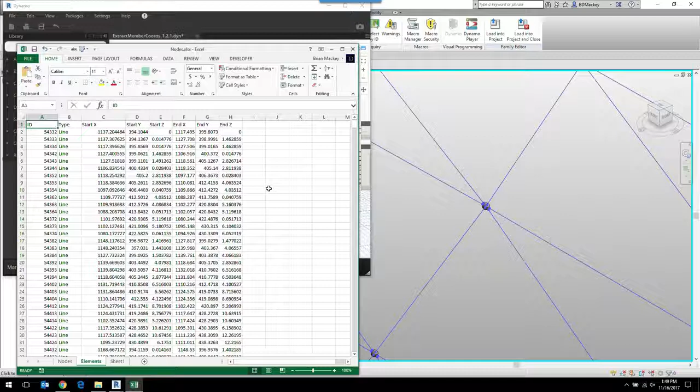Okay, alright, so I have one more. Oh good, we're doing well on time. So I have one more little thing, I'll have a picture for you in a second.

So I learned a few things from these different projects. The 2-point adaptive component that had all the bells and whistles ended up being really key for that bridge. But the whole model was so parametric and had so many things that they wanted to flex, it ended up being not very user-friendly for anybody other than the people who built it. So that was a little bit challenging.

But it didn't end up being thrown away, it is getting built. It did end up being used on a project, we didn't have to throw it away. It turned into the actual model, so that was nice, and the fabricators liked it, so we did something right.

Then for the roof, it was pretty simple. The big lesson learned there was to keep the geometry more simple than I needed it, just to speed things up. Because if what you're going for is that conceptual tool to get some real quick iterations, it doesn't make sense to have your computer churning.

Then the Dynamo scripts sort of evolved. I've done this on a few other projects now - using the little node or using the endpoints. What I found out is if you're using actual structural elements instead of generic models, which is part of the issue here, those structural elements have analytical lines that you can pull into Dynamo and just forget all about your geometry. Your users have to model it correctly, but you immediately have those lines and points, and that turns out to be quite a good tool for us later.

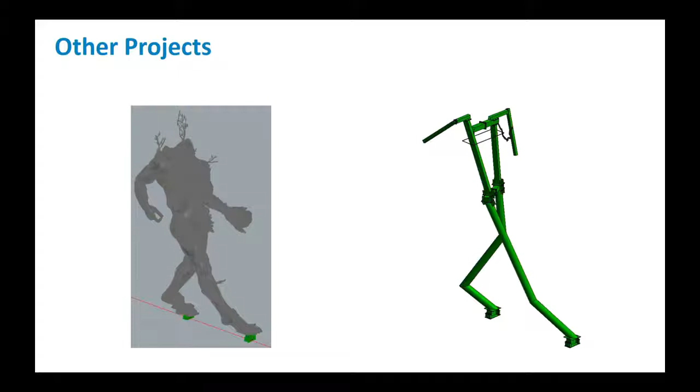So here's another project that we're working on. We do some funky stuff at my company - everything from arenas to sculptures is what I like to say. So this is a little sculpture that we're working on. I'm not entirely sure how this is going to stand up, to be honest, but we'll see how it goes.

So we've been doing the same thing, trying to figure out where in this little man we're going to put the structure, and then be able to pull those points that are not regular at all and do some analysis on it. I think that's the end.

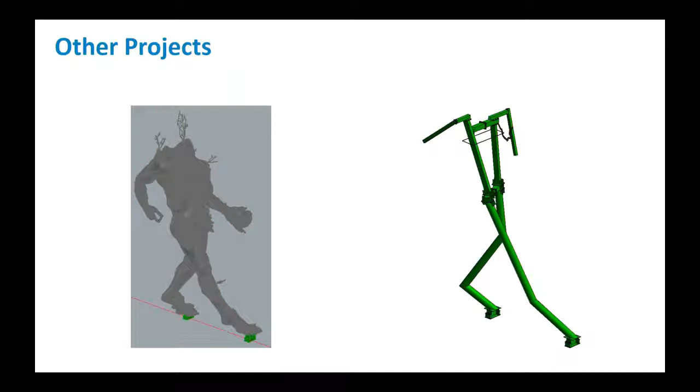Do you think you could have set up the bridge model using Dynamo and out-of-the-box member components? Or do you think, given the complexity it had, it just needed that parametric setup? So the question was: could you use Dynamo for that bridge to get it going with direct structural components? Yeah, this also was when there were still issues with structural components - you started this in 2016, I believe, and Dynamo had some issues with structural components a lot of times. I think that was still in Dynamo 0.8. There still are issues, yeah. So it really wasn't feasible, I don't think, because we did think about it. Think about how you would set that up to place all the members in space and then repeat them. Once we started thinking about how repetitive this pattern was, it felt like a better tool for the job to use the adaptive components and the repeater functionality in Revit. So could you? Absolutely, I'm sure you could - it just seemed like a path of least resistance to go the other way.

Well, but once we figured out how those repeaters kind of flexed funny, maybe that would have been different - well, all different variations too. Early on, we got this created and were able to hand it over to the structural engineer, and all they were doing is playing with links, etc., and it worked really well for them. It wasn't like you needed to know anything crazy. I like Dynamo, but a lot of people freak out over the spaghettiness of it, and if I just have a Revit family with a couple parameters, that's something they can use - this was before Dynamo Player, for sure. And yeah, it would have been a little bit overwhelming to hand over a Dynamo script that you have to flex. So a user interface at the end, maybe - but now with Player, it maybe would have worked. So could I do this now instead of 2 years ago?